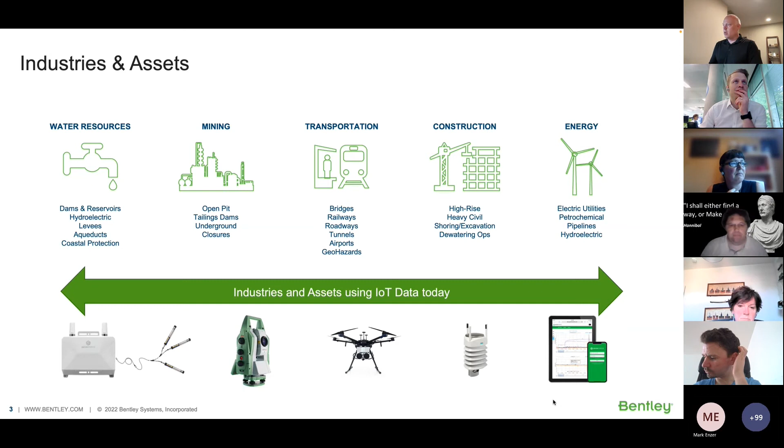So the sensors are largely in place or required in some applications, but how do we get them into a workflow that can be used within a digital twin? Well, the story has to start with understanding the different types of data being collected. Some of it is manually collected. Some comes from enterprise systems or SCADA systems that have been in play for decades. Other devices are using IoT hubs or IoT devices that make data available at different frequencies, different reading time frames, or different collection methods. But all that data has to coalesce within a platform to be made available into a digital twin experience.

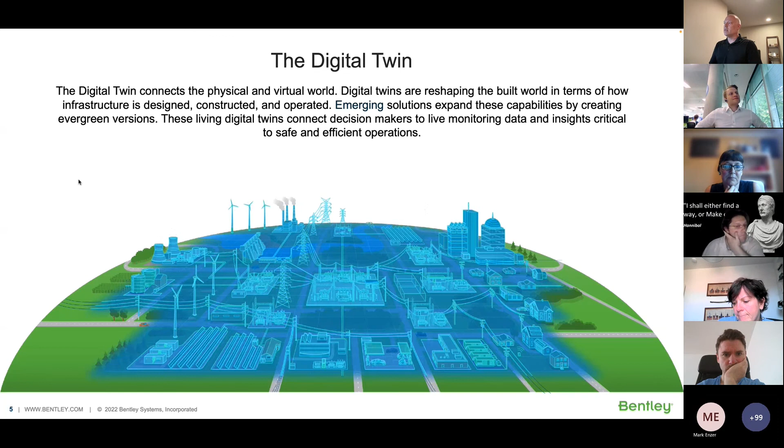The concept is: take any city environment where you have different assets from different industry perspectives. We digitize those assets and then enable them with IoT devices, sensor devices, to breathe life into them, to make the digital twin become alive and actionable - something that can be updated by the minute, by the hour, rather than by the day or the quarter or the year, by other data set ingestion.

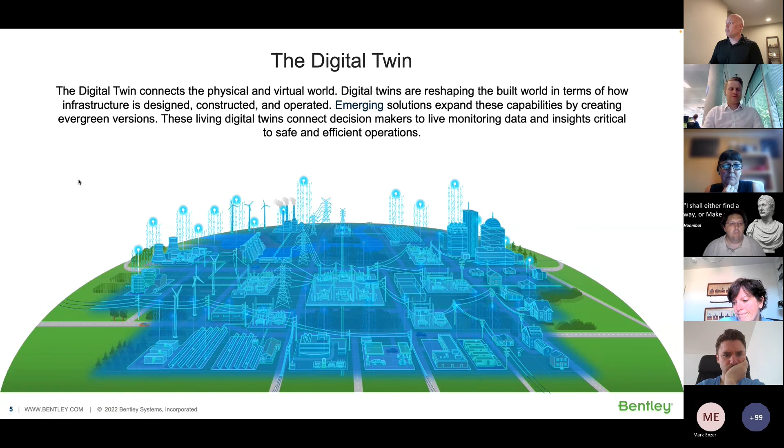So for Bentley and other applications being built globally by many vendors, the concept is there's engineering information that becomes relevant. There's operations-level documentation, IoT feeds like we're talking about here, cameras, LiDAR, and then there's asset performance, where you have asset tagging, maintenance records, inspection records that have to land on a digital twin that needs visualization information as well. So you might be using immersive environments with 3D applications, considering the 4D time domain of the twin, and then engaging with AI and machine learning and predictive analytics all mixed together into the project-level digital twin.

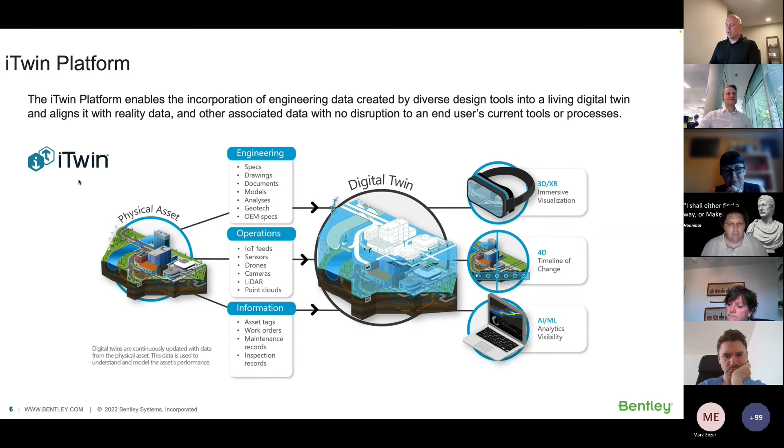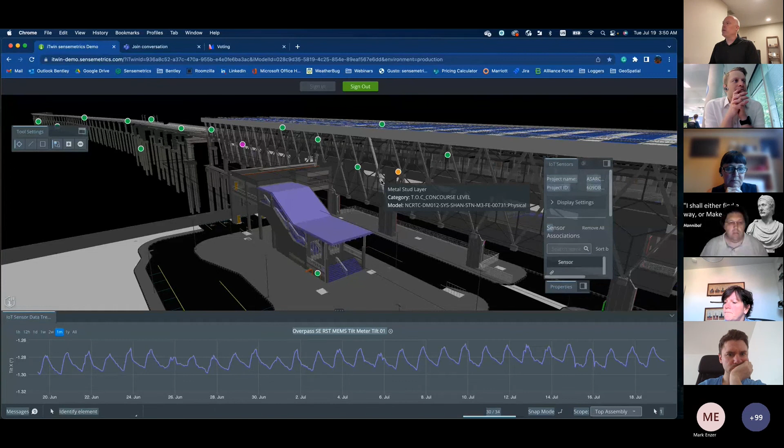So now I'm going to switch over to give you guys an example of a working digital twin. This is a rail application - a rail station. Both the subsurface elements and the actual structure itself are depicted here in view. There are many layers within this document, this digital twin, that allow you to engage in whatever experience you want as a user. There may be engineers looking at this, or architects, construction managers, city and urban planners. There may be rail maintenance right-of-way guys looking at this asset, and how they make use of a digital twin to quickly understand the status of this asset.

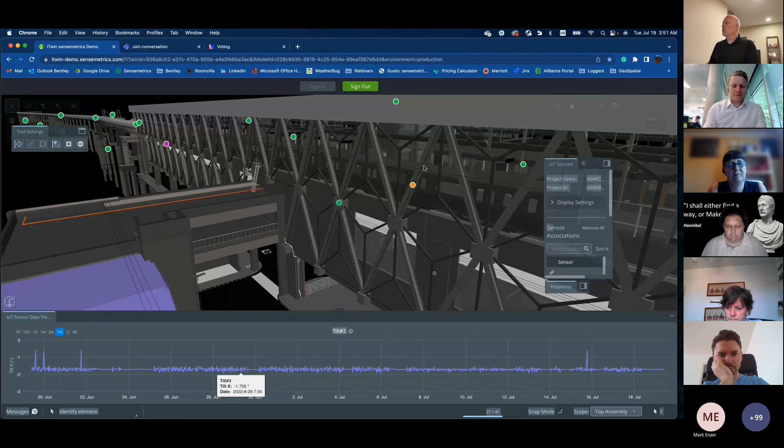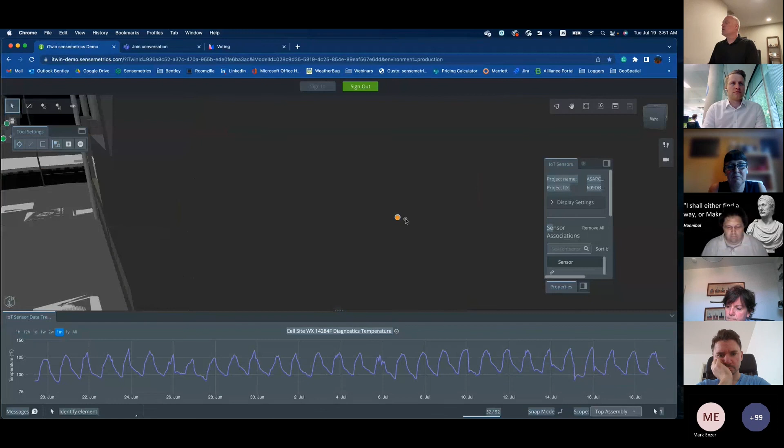By associating sensors at certain critical elements of the twin, we're able to quickly depict whether this structure is tilting. Maybe we can look at another sensor here, zoom out - this one is a temperature sensor, and you're looking at an alert that's been tripped. That's why it's orange as a status indicator. You can see a trending increase in temperature, albeit it's diurnal, but it's exceeded some threshold. The concept here isn't to look at just one particular sensor, but to make all this information available in a twin environment so that a larger audience can make use of information in a holistic, unified way - an approach of having all the information coexisting.

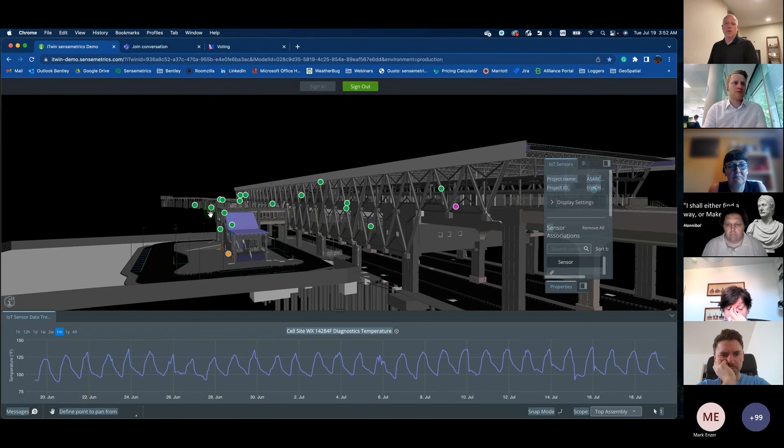And this is a very high-level, little slide deck of how digital twins can make use of IoT data. And that's my short presentation, but I welcome any questions that may be coming in.